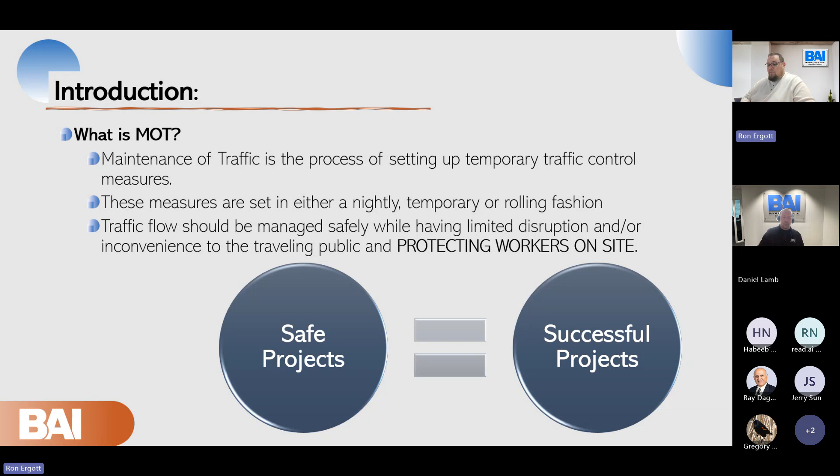I've been asked multiple times in multiple different venues on how we can make work zones safer. It's really the most ambiguous question I get asked a lot because no two work zones are the same and no two projects are the same. So much detail goes into the design and execution of an MOT plan. We're going to dig into some of those topics, explaining how we can better design and execute these plans.

Okay, moving on to objectives, understanding some key points of MOT. We're going to start with purpose. One of the main purposes is to provide a safe working environment for the construction personnel, motorists, and pedestrians by minimizing hazards associated within the work zone.

In addition, the traffic control manager must attempt to maintain the flow of traffic through and around the construction area, reducing congestion and delays. The MOT plan will help delineate clear paths for vehicles and pedestrians, ensuring that traffic can navigate safely through and around the work zone.

Other key details are public awareness and communication. This is to inform the public about construction activities, detours, and potential impacts on traffic. The plan should provide clear communication about what to expect and how to navigate through affected areas.

Next, we're going to talk about components related to MOT. This should include signage, lane closure, detours, flaggers, barriers, pavement markings, and traffic signal adjustments. Traffic control devices will inform drivers in the work zone and guide them safely through or around the area. Detour signage should be clearly marked. The sign should be visible, highly visible, and easy to read.

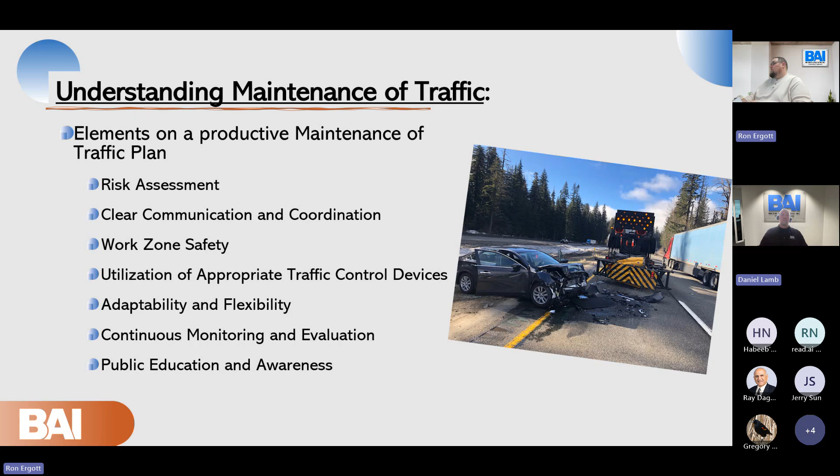So many of us have been through different topics and get to talking about work zone safety. And one of the things that happens a lot when a job goes to construction is the design versus construction mentality. I've seen it so many times in partnering meetings at State Highway and such that we look at it as an us versus them concept from construction to design and then design to construction. If design would have done this, we could have avoided it. If construction just would have done it per plan, then we could have avoided this.

This isn't just regarding MOT, this is regarding most projects that get to the point of construction, but specifically regarding MOT, we understand designers use construction specifications to drive their MOT plan. And then construction workers and managers implement that plan to the best of their ability. But why is there a disconnect? A lot of times it just comes down to communication.

The construction workers understanding the MUTCD and the regulations and standards and why they're implemented is vital to the actual implementation of the plan as it was given in the contract documents. And then also informing designers of courses such as the maintenance of traffic manager course given by MTBMA. It gives a good understanding of what the construction managers and inspectors are looking at in the field.

A good designer understands why we put the devices on paper, and a good construction worker understands how to properly implement those devices. So putting that communication together can hopefully avoid some of these metrics you see up on the screen. This is a graphic from 2022, and you can see the amount of crashes and lost lives in work zones, and it's unfortunate.

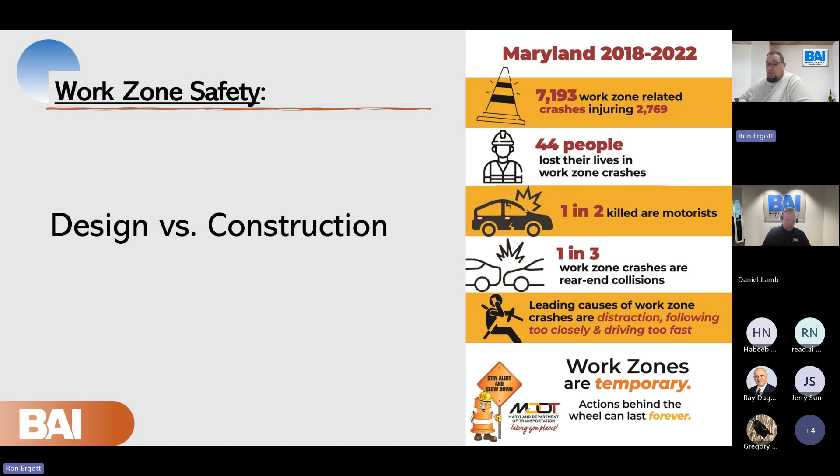But as this week is Work Zone Safety Awareness Week, including some of these graphics in here is a good talking point. So with that, I'll transition to the next slide here, and we've kind of pulled that Band-Aid off about talking about communication. So now it's time for some audience participation with you guys.

We're gonna take a minute and watch this video. It's from New York DOT. And I want you to think of two questions. What was your role in MOT as your job sits today? And then as a group session, what do you think could have been done to avoid or mitigate this?

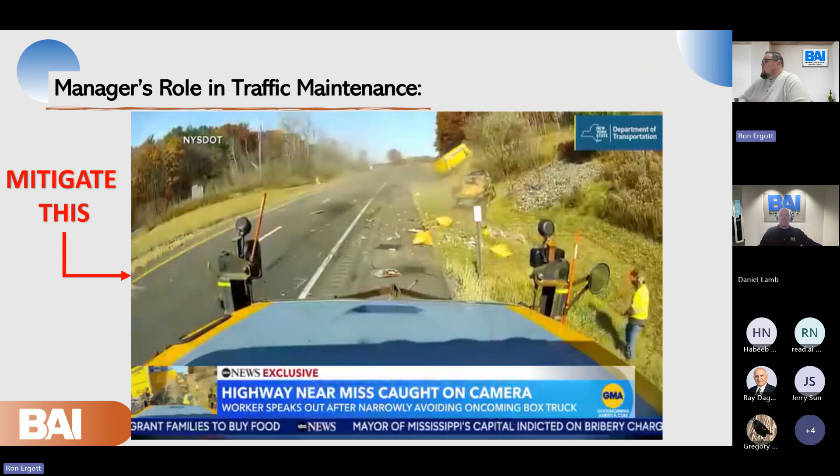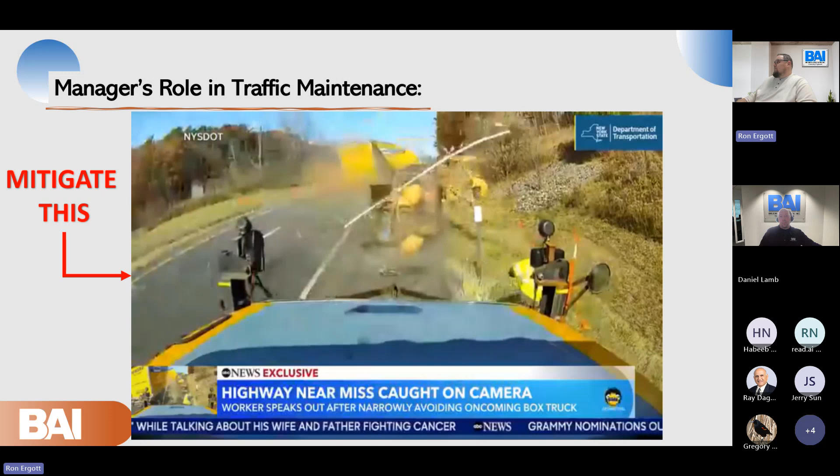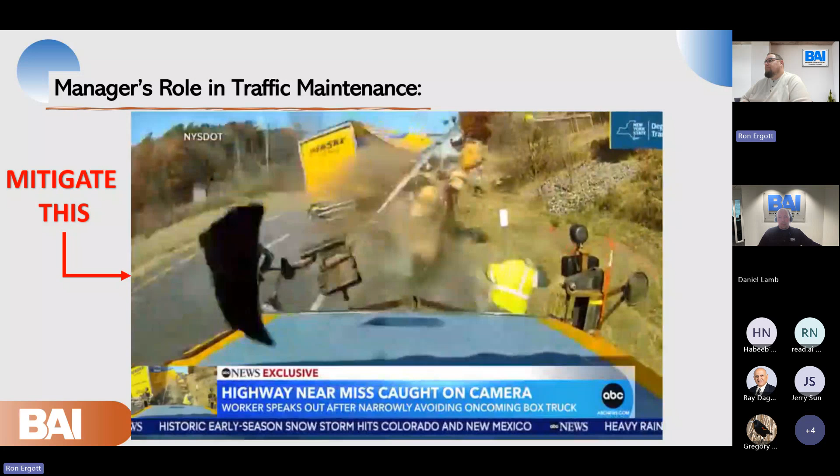ABC News exclusive with the highway worker who narrowly avoided being hit by an oncoming box truck. Trevor Ault is here with the story. Incredibly troubling, scary images there. Trevor, good morning. Good morning, Rebecca. We often see signs about traffic fines doubling in work zones because crashes like these can be really dangerous. And this morning, we're hearing from that road worker who narrowly avoided disaster. Watch the dramatic moment a truck narrowly misses a road worker on a New York highway. I looked out at the right time and got out of there at the right time. 61-year-old Chuck Ellerson tells ABC News in an exclusive interview how he averted what could have been a tragedy. I tried to get out of the way the best I can. I thought for sure it's close enough to where it would have done a lot more than what it did. Ellerson is a highway maintenance worker. He says he'd been collecting trash on that road when a box truck darted in his direction. Next thing I know, I said, this guy's not going to miss me. Dash cam video from one of the two work vehicles shows the truck crashing into the work area, demolishing one of the vehicles. Ellerson narrowly escaping uninjured.

Okay, so that's a scary video. There's no argument to that. I know a little bit of the backstory of it from researching, so it's kind of an unfair advantage for me. But if anybody would like to chime in to think about what could have been done to avoid this accident or mitigate this potential accident? You can raise your hand or just go ahead and speak freely.

I mean, were there enough safety devices to protect this guy ahead of his truck? Yes. So good point, Ray. The truck that you see the video camera from was a protection vehicle. So he was standing in between his deploy truck and the protection vehicle at the time of the accident. The truck actually struck the attenuator partially as well. Oh, well, thank you. All right, Mr. Hassan, go ahead.

I would say right lane closure. Okay, so a buffer lane. But yes, and also providing some temporary traffic barrier. Yep. So, like I said, I have a little bit of background, but you're correct. A buffer lane would have been good. Does anybody else got anything to add to it before I go on and explain a little bit of the scenario here? Any other thoughts that could go with it?

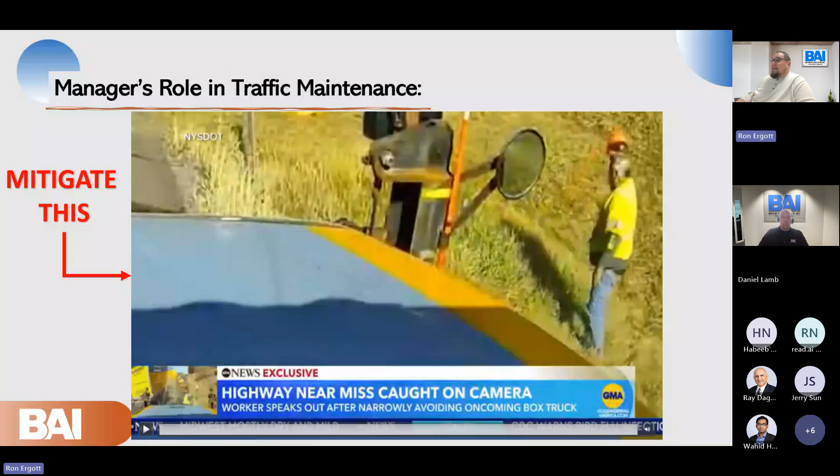He should have never been between two vehicles where he had a blind spot and looking out into traffic. That is just absolutely not an ideal situation. But I want to back this up real quick, and I want you guys to see prevailing speed of an accident in the work zone.

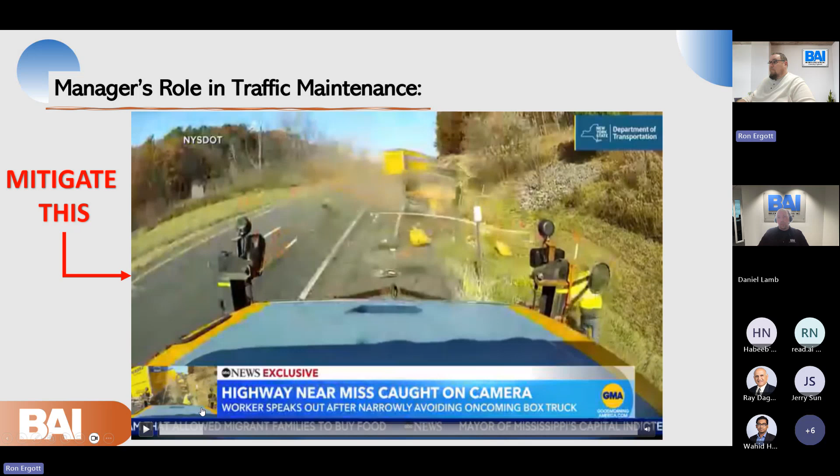I want you guys to watch his hard hat. With the highway worker who narrowly avoided being hit by an oncoming vehicle, his hard hat was blown completely off of his head when he had that near miss. That near miss, thankfully, was nothing worse. But that is the long and short of that process.

So when we're talking about this as a whole, here's some graphics that I know you guys have seen before when you guys are doing your standards and everything like that. But I want to get in a little bit of detail about what it means in the construction world to us in the field.

So the bottom of the two graphics shows an ideal setup of a paving train on a 3-lane roadway. So we're talking interstate paving. We have the work in the slow lane, with the trucks entering and leaving the second lane, and the third lane, depending on how you guys are naming your lanes, depending on which client we're working for, the fast lane is open. So you can see how everything's stationed.

And we have these colors that we call it in the world of construction. Everything that's hashed there is what we would call the red space. That is the danger zone. That's inside the work zone on the active roadway. When we would get to the shoulder, that's what we would call the yellow zone, where you have a buffer, you're protected by equipment and workers. And then you'd get into your green space, the green zone. That's where if you needed to take a phone call in the work zone or anything like that, hopefully you're off in the green area.

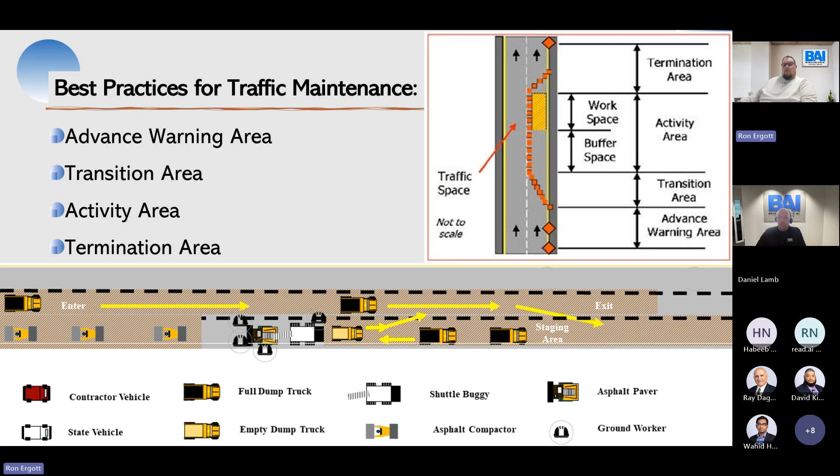Go ahead. No, right. You got any? I'm sorry. Did you have something else? I apologize. No, that was it.

Thank you. So, challenges in the field. We discussed some of them, but I want to go over a few metrics with you guys here to talk about it and explain why this is so important. And like I said, the reason we're doing this training today, this is Work Zone Safety Awareness Week. Today is the day for training on work zone safety. So we modified the maintenance of traffic from a construction manager's perspective to talk about work zone safety too, because it's a good forum for all of us to have that conversation.

So since 2019, there have been 8,409 crashes in Maryland work zones. Of these, 6,185 resulted in property damage only, 2,923 have resulted in non-fatal injuries, and 56 have resulted in fatalities. 34.7% of work zone crashes have resulted in non-fatal or fatal injuries. That's a staggering over 1/3 of the crashes resulting in an injury.

This dump truck here, a state highway dump truck, is from an incident in District 7 where they were out doing a litter blitz pickup. You can see the trash bags in the back of the truck. Thankfully, the workers were not inside the truck. They were in the green space on the shoulder. But you can see how quickly something like that could happen.

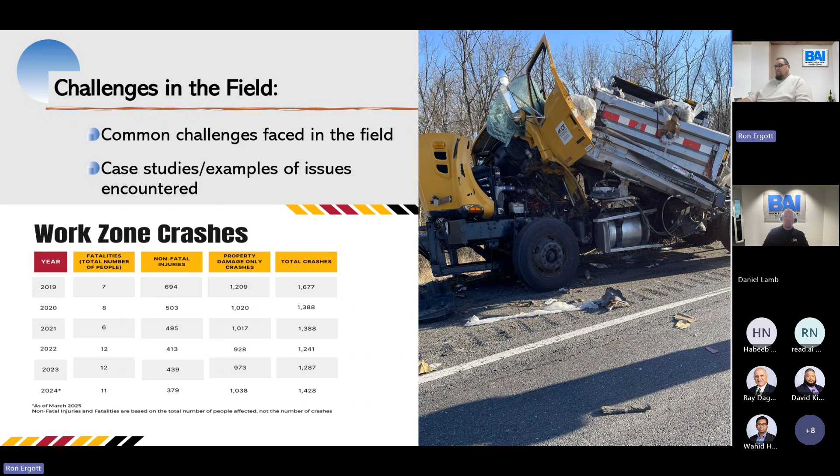So again, I was talking about Work Zone Safety Awareness Week. We talked briefly about the MTBMA Traffic Control Manager training, mainly for construction workers and inspection staff. But you could look at some of the training manuals and stuff. And if you guys need anything, we might be able to pull some stuff and you can see some of our books to understand what that is.

So that leads me to the next topic. How many of you guys have seen this memorial at a convention before, with a show of hands? I know it's blurry on the screen, but this is the National Work Zone Safety Memorial that honors everybody who's lost their life in a work zone. But how many of you guys personally, I'd like a show of hands, if you could just raise your hand on the Teams app. How many of you have personally been impacted or know somebody who's been impacted by a work zone fatality?

Okay, well, I want you guys all to know that every one of you has. Because my Uncle Scotty, Scott Ergott, was a SHA maintenance worker, and he was taken from us early at the age of 23 in 1984. He was changing a tire on the Capital Beltway right out by the IKEA sign, just past Greenbelt. And there's a memorial, if you guys have ever gone down to District 3, that's for him and Mr. Bean.

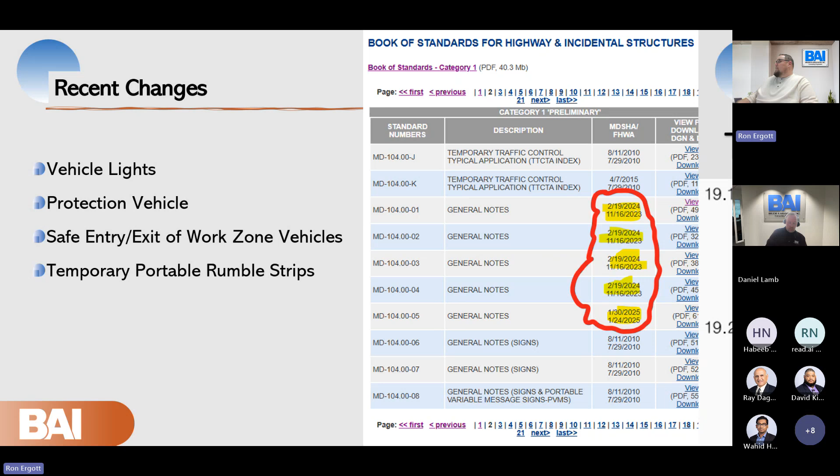So going into the temporary portable rumble strips, because I want to talk about some new opportunities to increase safety for our workers and for the public. They're mandatory now in the way the standards are written today in the update. They're mandatory for all daytime flagging on 2-lane roadways longer than 3 hours, equal to or over 40 miles an hour. So that's a brand new standard that's put in. You guys can see the snapshot of the standard here. However, they're also recommended in advance of detours, flaggers, lane closures, temporary signals, and any location requiring reduction in speed.

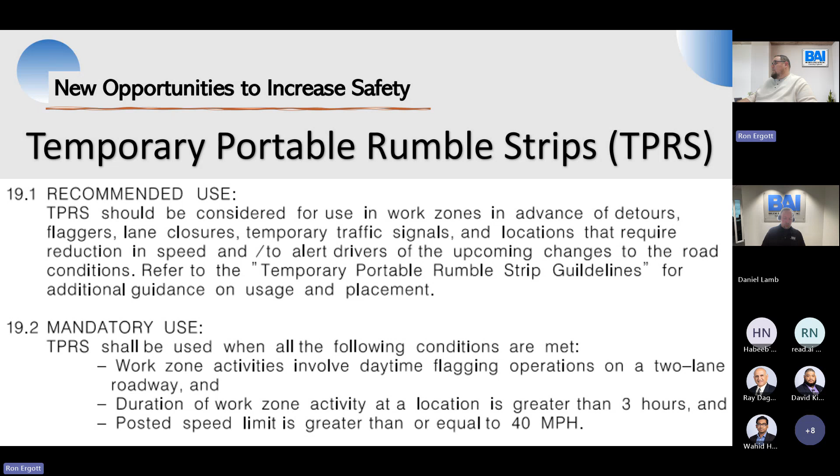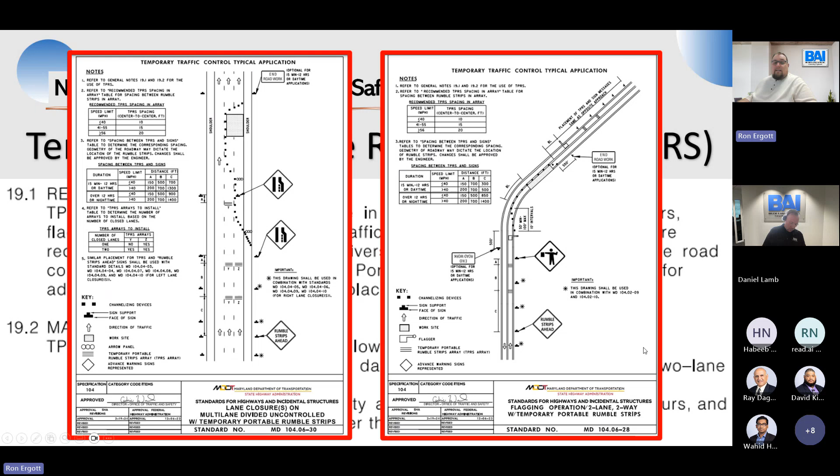There's currently 2 standards utilizing these temporary rumble strips, so you guys can see them listed there. I know you can't really take it in, but I'll just let you guys take a look at that as you're implementing any changes. Then also, from one of our conferences that I've been to, I've actually deployed these at one time in District 5 as a pilot. And this is the type that I used. So I'm going to go ahead and play this video so you guys see what these temporary rumble strips are, and then ask any questions about the process.

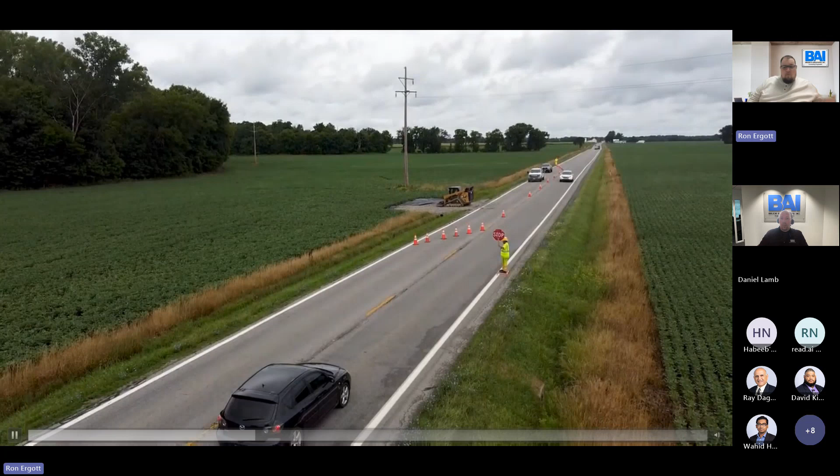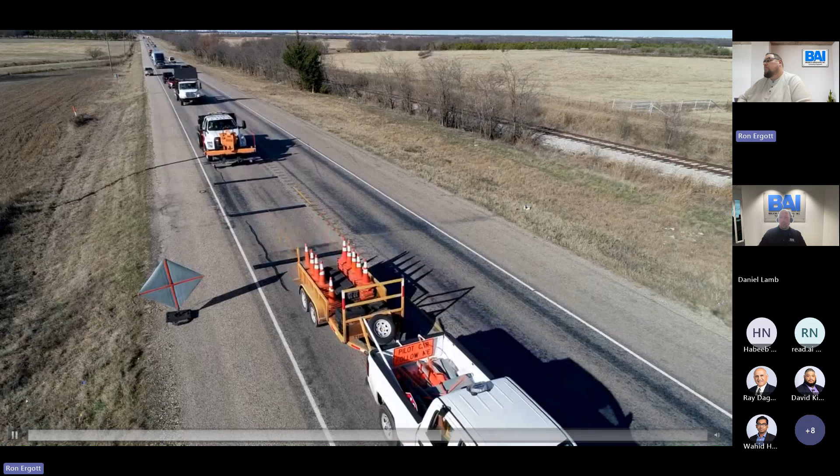For more than 3 decades, PSS has developed innovative safety solutions that protect all road users, from workers to drivers and pedestrians. One of our proudest accomplishments is the development of the RoadQuake safety system. RoadQuake is a highly engineered temporary portable rumble strip that is placed perpendicular to the direction of travel with the purpose of increasing driver attention to changes on the road, such as work zones and other temporary conditions. As motorists travel over RoadQuake, they will hear and feel the significant vibrations generated by the strips. This sensation has been proven to redirect drivers' attention back to the roadway as they travel safely through your work zone. Distracted driving has become a leading cause of work zone fatalities and injuries. Designed to reduce accidents and save lives, RoadQuake can lower the rate of work zone intrusions caused by distracted driving. Through our years of extensive testing and research, PSS has become the leading authority on temporary portable rumble strips.

Visit our website at pss-innovations.com for more. So that's one of two portable rumble strips that is currently on the qualified products list

at SHA. The second thing to talk about are the AFADs, the automated flagger assistance devices. It's a temporary traffic control device that can be operated remotely. AFADs are used to direct traffic in work zones and are designed to keep flaggers safe. Flaggers use a radio control unit or cable to remotely operate the AFAD, and they have a mechanized gate arm and lights to control the traffic. These devices keep flaggers out of the traffic lane and away from danger.

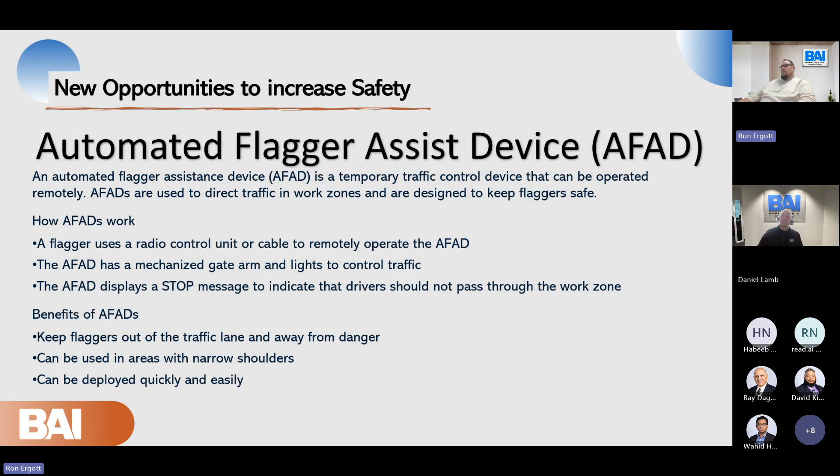There are two standards that utilize this currently at State Highway. Or here are two standards that utilize it. There's more than that, but just to get a concept there. And then also, same thing on this one, another quick little video to show you guys.

The RCF 2.4 Automated Flagger Assistance Device was the first of its kind, developed by North America Traffic over 25 years ago, and was the first AFAD successfully tested and approved in Canada and the US. Since then, it is still recognized as the safest alternative to human flaggers for temporary work zone traffic control. Based in the Niagara region, North America Traffic pioneered the development of trailer-mounted, battery-powered, solar-assisted traffic control systems for temporary installations. Our new and improved design allows for two units to be locked together, allowing them to be towed as one unified trailer, eliminating the need for tandem towing.

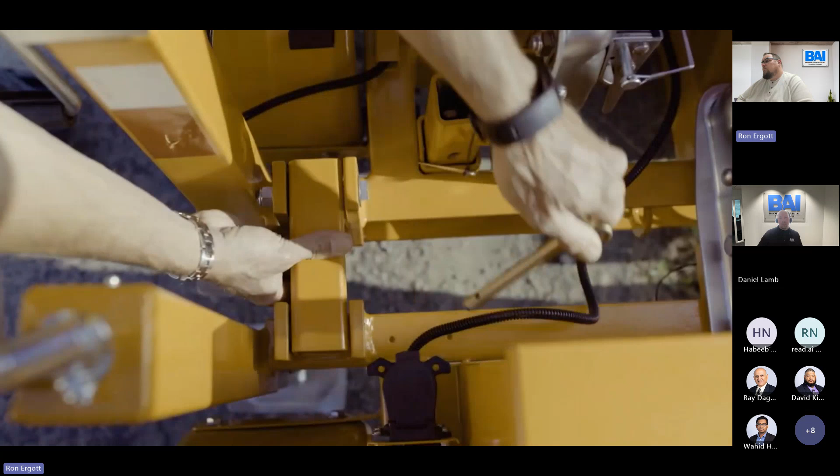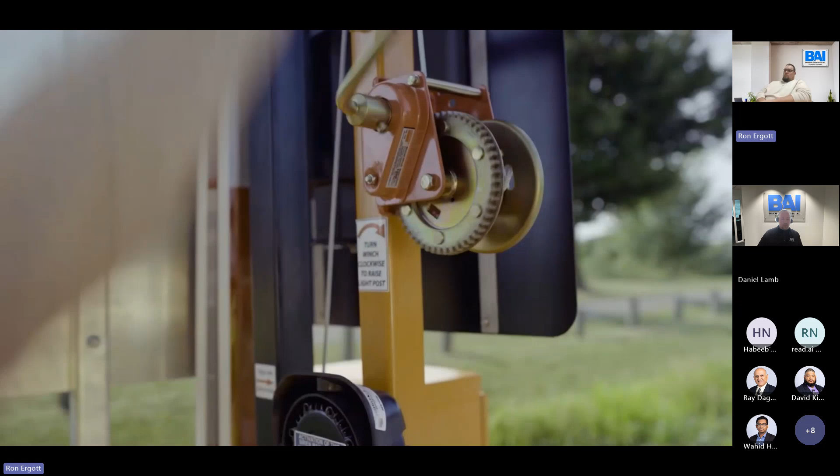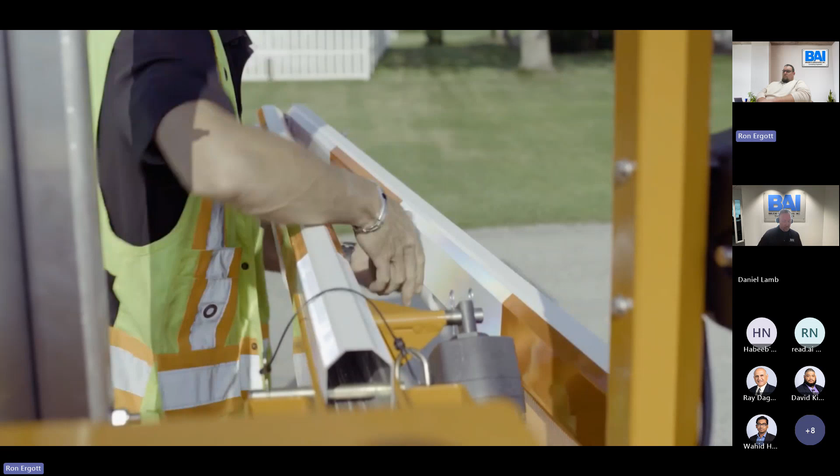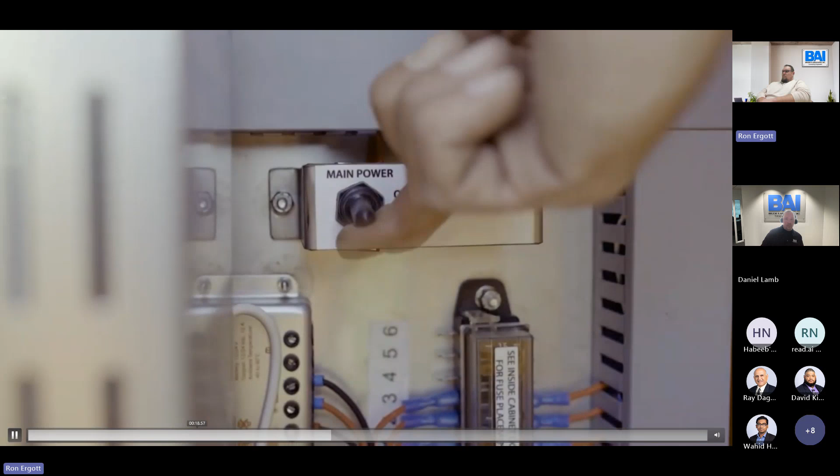All right, I'm not going to get into too much more of it, but have any of you guys utilized AFADs or temporary portable rumble strips in any of your MOT plans before? Okay. Well, if you guys have any questions about them specifically, I have deployed them both in active work zones before, and am more than happy to have that conversation with you to explain how they work and how that process goes. So with that, I'll turn it over to Dan for our conclusion.

Ron, a lot of good key details in that presentation on this Work Zone Safety Week. But to conclude, today we discussed the purpose, components, planning, and standards, and our role together. As a unified team, we must prioritize safety, use best practices, collaborate and coordinate, enroll in continuous ongoing training, maintain a risk register, document anything you see, and say something if you see something. Remain adaptable and flexible.